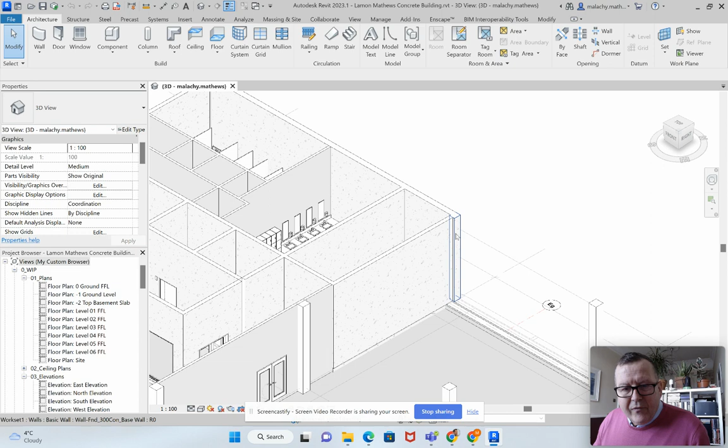So I've done a little bit of tinkering around from video number 4. I've removed those columns on either side there. I didn't need them, because this is all cast in situ concrete going on here. So it serves the purpose of the column in terms of supporting everything else that goes up above it and around it as well.

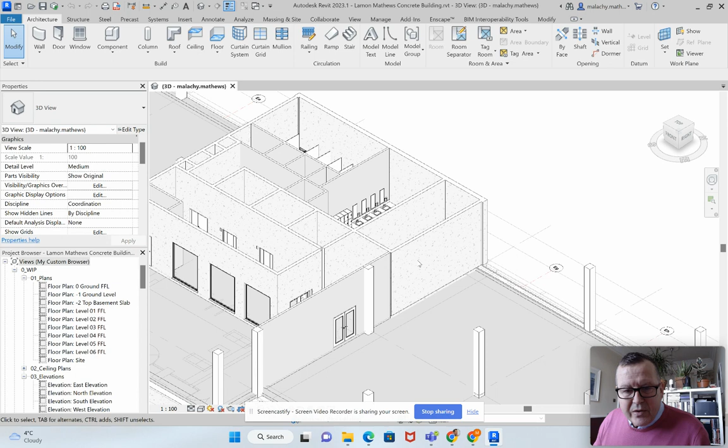I put a little bit of color, grays, into my materials as well. So you can see that's a block wall with a plaster finish to it, and that's the poured concrete wall there. Just to give a little bit of distinction, these walls in here are steel stud partitions as well.

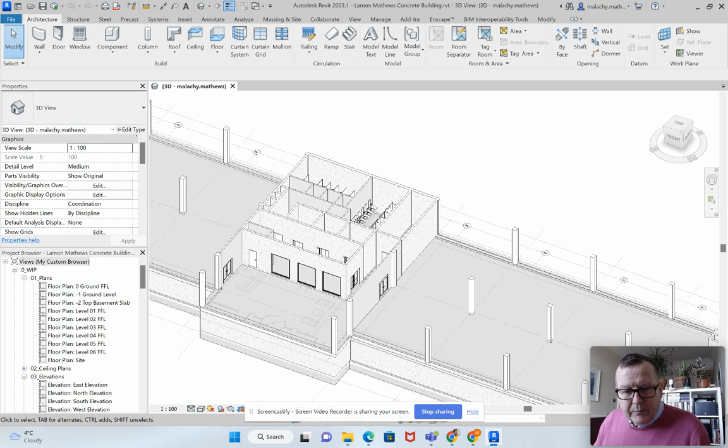Okay, what else have I done here? Yeah, I've added a couple of columns in here. If you remember in part 4, I said what I'm going to do is bring curtain walling all the way around here and bring that up 3 floors or so. And I'll come back to that at a later stage.

Now I'm pretty happy with everything that I've done so far. So what I've done is I've cut out the voids here for the lift shafts, for the service zones there, and for the stairs on the 3 cores here as well.

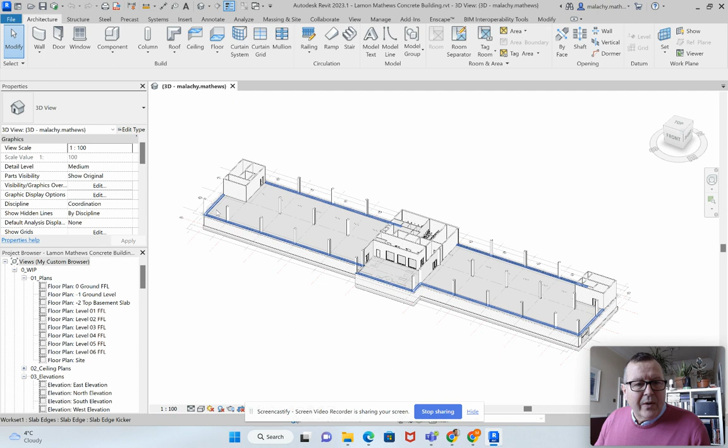All right, I've also—let me just go into the ground floor plan here, and I'll go into the section. And I've actually gone and thickened up this once again.

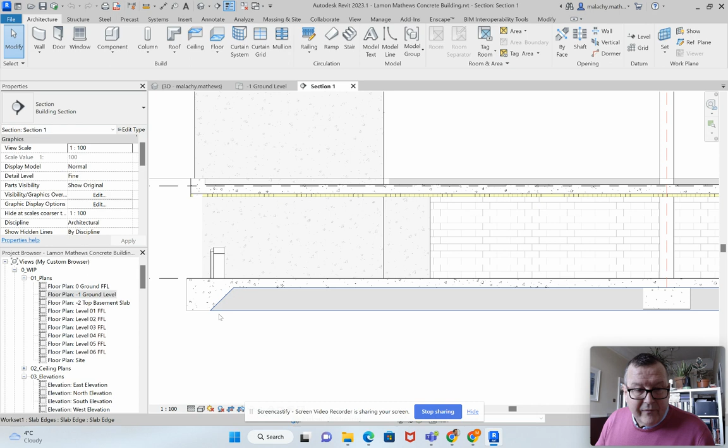So I went into the profile family and did a save as, and I just increased it. There are nice little parameters within the profile family which allow us to drop this down lower and push it out a little bit further there.

And then I changed the pads here as well. I'm now going to use a 1500 by 100 pad underneath the columns, and that kind of lines up quite nicely in terms of an even spread.

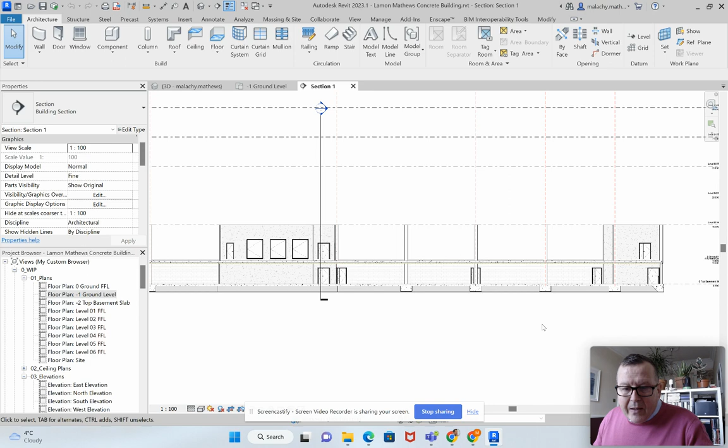And what I'm thinking about is the digger that's coming in to dig out the foundations and the pads and things like that. So that's all working out quite well there, I think.

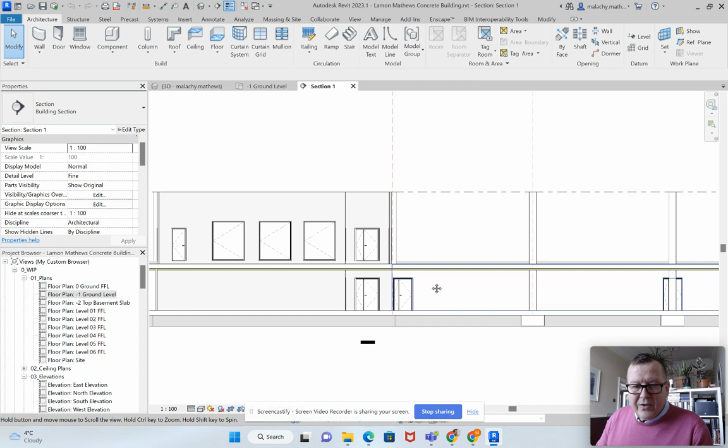You can see I've got my insulation underneath the basement slab, and I've brought down my columns to meet the slab here. Because if you remember that little grey zone there, that's actually the 200 mil that we have for the raised floor access. And that little grey zone as well there is the upstand.

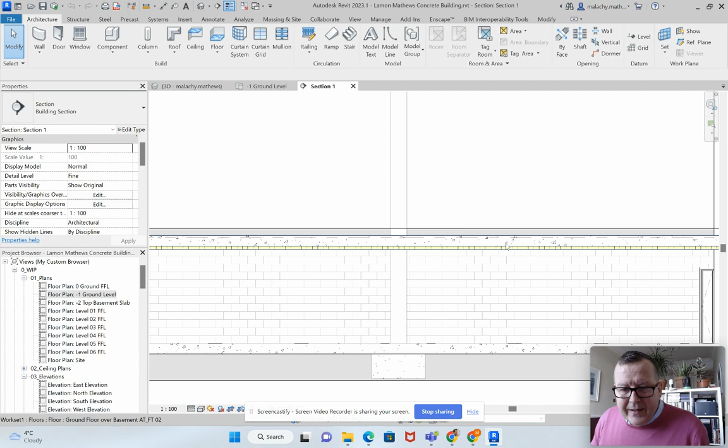Is the upstand that I created to close in the raised floor access as well. So I'm pretty good to go there now in terms of bringing this up to the next level. So that's what I'm going to do with you here now.

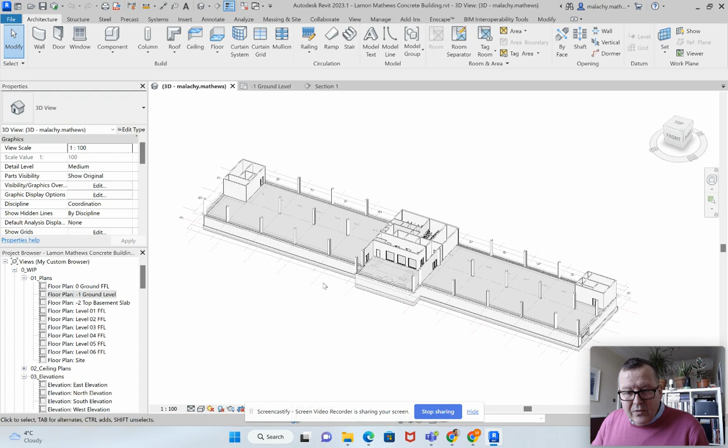And so you'll remember, in the section here, if I go across to the levels, our basement from here to the ground finish floor level is one particular dimension. Now the ground finish floor level to the level 1 finish floor level is one dimension, and you can see that this is slightly smaller here.

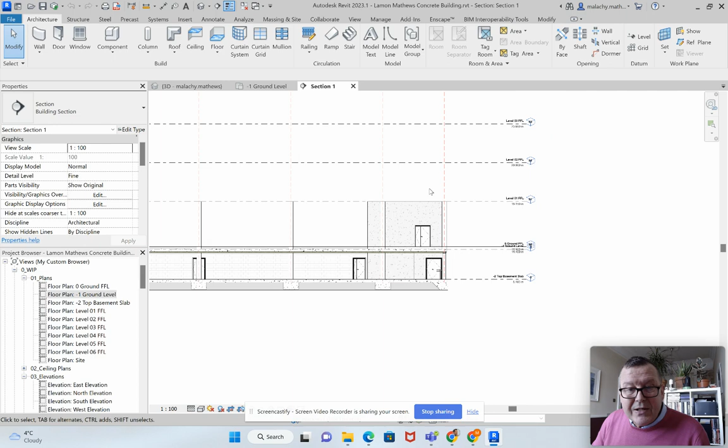So when I bring my columns up, they might be protruding too high, so we need to arrange that. But once I get it into here, I'm pretty good to go nearly the whole way up.

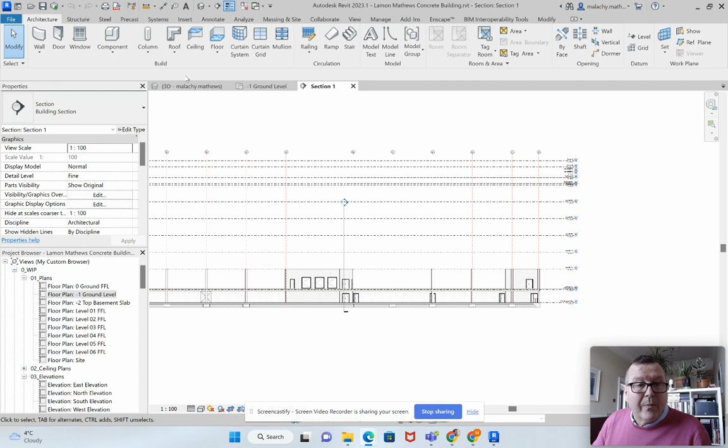Okay, so that's where we're at. We're back into the 3D. Now, this is the way I'm going to do this.

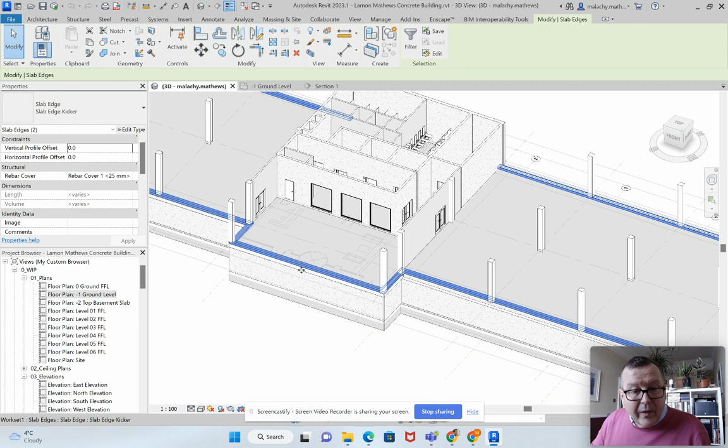I'm going to select both my upstand—so I need to there—and I'm going to select onto that my floor. If I can grab that, I want the wall. Let's get in here a bit tighter. See if I can, yeah. Okay, so there's my floor and my upstand, and I'm going to put that onto the copy clipboard over here.

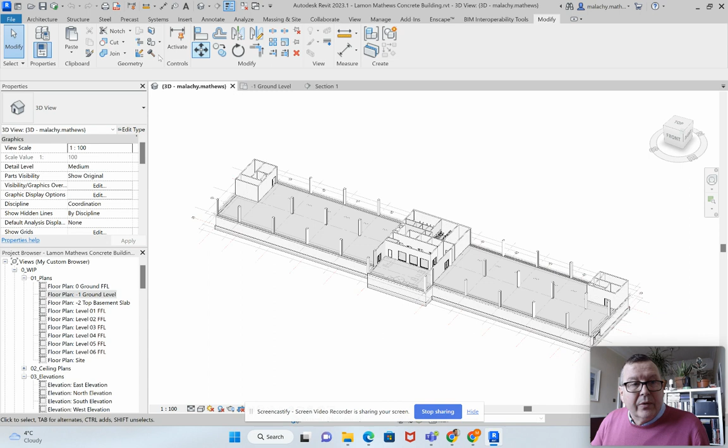So I'm in the modify panel and put that into the copy clipboard. Now I'm going to go from the copy clipboard back into here into the paste, and I'm going to say paste to selected level, and I'm going to paste this up to level 01 and go OK.

Right, now the nice thing about that is that it's bringing the voids up with it as well. If I go into the section here, you'll see that we've got the insulation. I don't need the insulation in this case here, so I'm going to select that.

And what I would do is I would do an edit type, and I would duplicate here, and I'd create a new floor. I've already done this—here it is, first floor over ground.

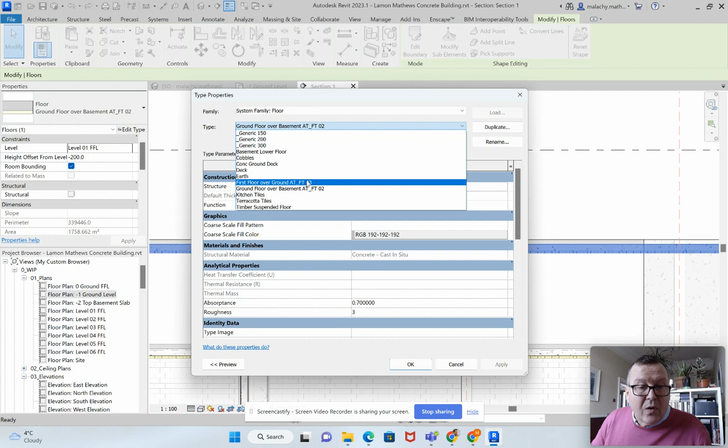Okay, so it's AT_FT 03. And if I go into the structure of it, you can see that I've taken out the insulation. I'm just leaving the concrete cast in situ there. So that's the first thing that I've done.

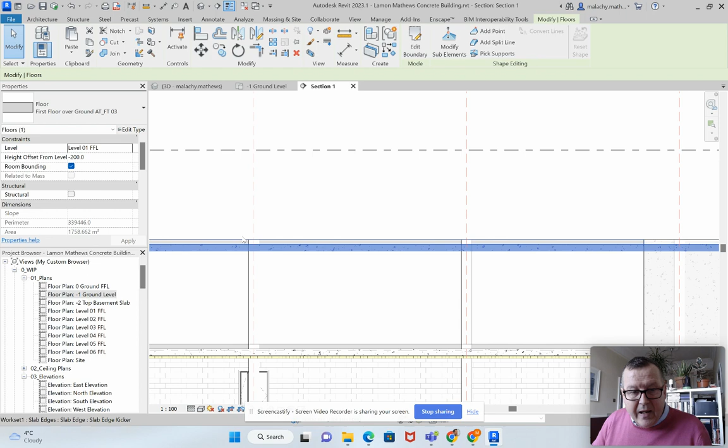And you can see as well that I'm bringing this down 200 again, minus 200 for the computer access floor as well. So if I go back to my 3D, now that floor is pretty much set.

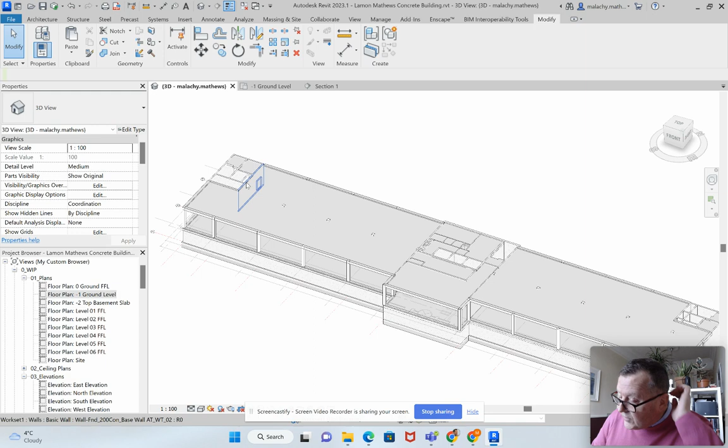Okay, you can see I've got my kickers for my columns here. I've got my kickers for the next pour of the cast in situ walls here as well, because I'm bringing those up as a core element, both in the main reception area core and the two lifts as well. Right, so I've done that.

Now my next job is to bring these walls up. Okay.

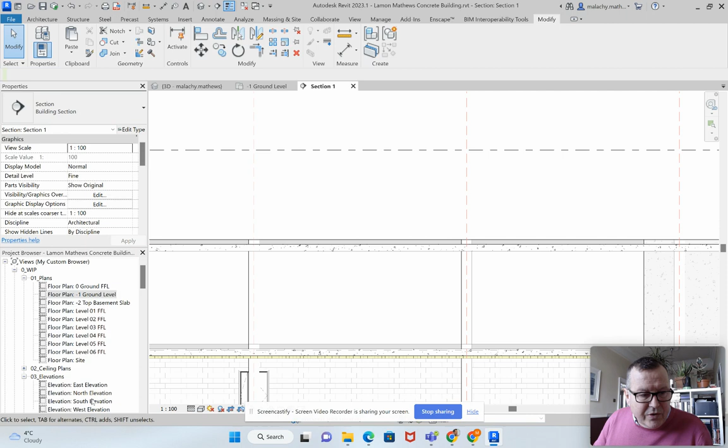I'm thinking of two ways to do this. I know these walls are too tall when they come up from level 1 to level 2, so I might just bring them up to begin with. I'm going to go into the section here, and in fact go into the south elevation, and watch what I'm going to do now.

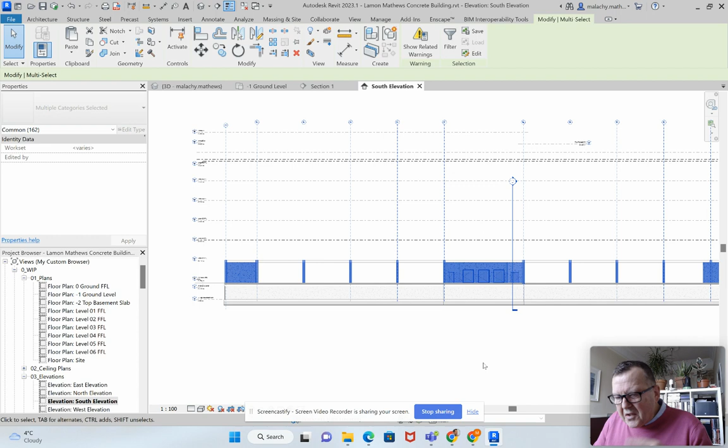I'm going to do a crossing box all the way across here, making sure I'm bringing it down low enough so that I'm grabbing all the toilets, the wash basins, and everything.

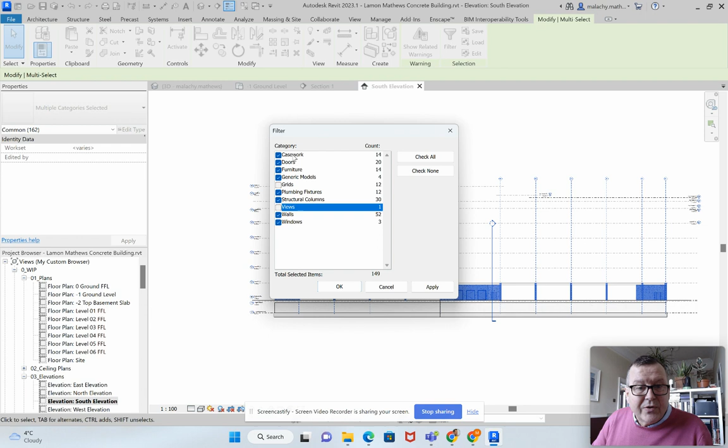Now I'll go into the filter here. Obviously what I don't want to copy are grids. I do want to copy windows and walls. I don't need the views. Structural columns, plumbing fixtures, generic models, or furniture. Everything else is good, so I'll go OK and put that onto the copy clipboard.

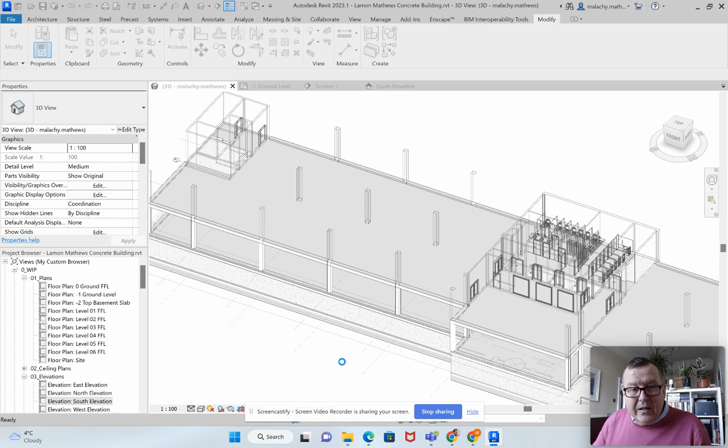We'll go back into our 3D view, click out, and now paste these to selected levels, to level 1. In a minute or two we'll unjoin certain elements and things like that. So there's my walls - my reception and my two stair core walls have come up there.

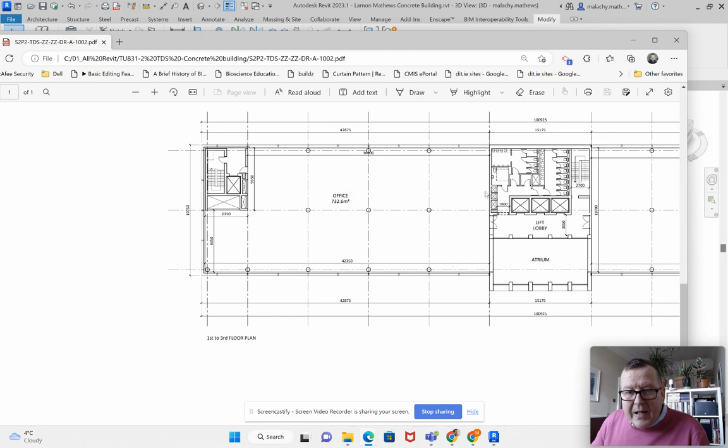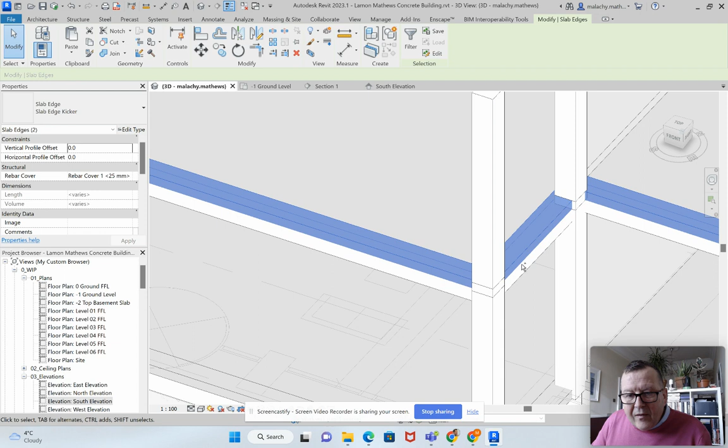But I'm going to put in the next floor. The columns have come up, just to show you there's a slight little difference here. So I'll pick the kicker and the floor, and that'll go back onto the copy clipboard, and I'm going to paste these now into level 2. Now that shows you what's going on here.

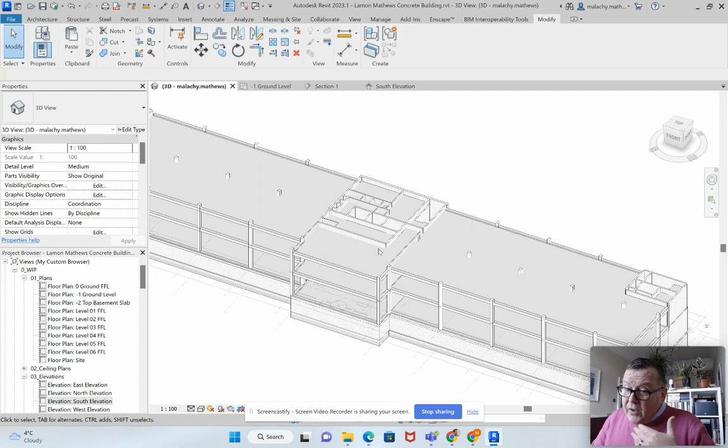So the columns are a little bit high, and the walls are a little bit high here. I just want them coming up 200 above the floor level there, so that's something I'm going to adjust.

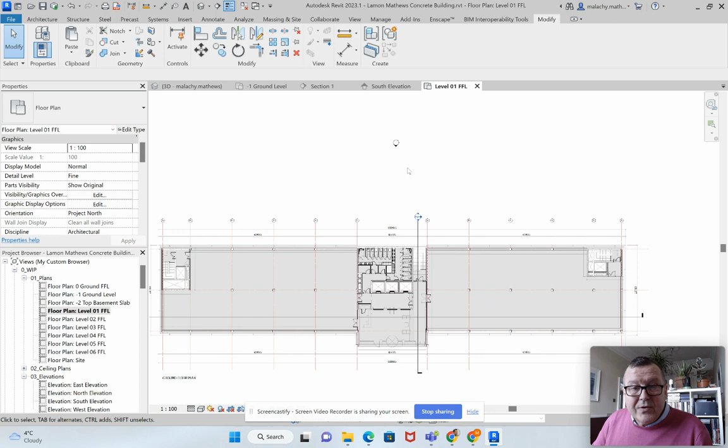When I've made the adjustments to level 1, I need to make those adjustments around here, then drop down those levels just to show you what I mean. I'll go back to the 3D here. If I take that particular wall and come over here, you can see the top offset is 650. I need to change that to 0, and watch what happens now - okay, so now it's 200 above.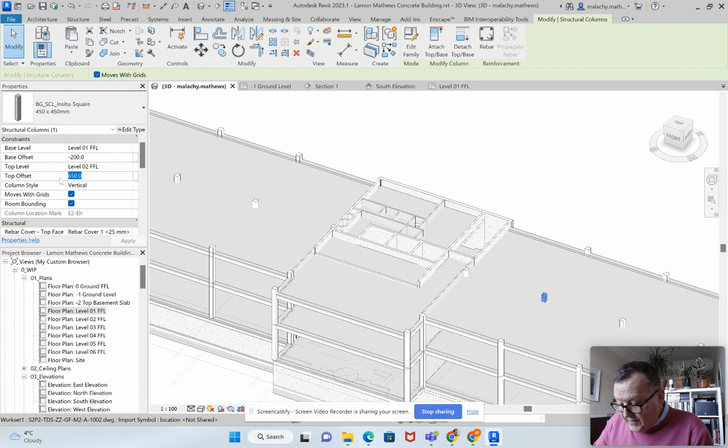Remember, we're doing this in a few stages, so that's the right thing to do here. That wall is gone, I know that - and that wall is gone too, I know that, so I need to go around and pick the rest of the walls. Also with the columns here, again you can see they have a top offset of 650, so we're going to make that 0, and now those are correct.

So that's a little bit of work I need to do, to take down all of these so they're correct in terms of the next pour. I need to go into my level 1 and do the adjustments here. Once I've got that done, I'm pretty good to be able to do that same system again - copy and paste up to level 2, up to level 3.

Now at level 4 and on, it changes again, so we'll address that at a later stage - that'll be part 6 or part 7, something like that. But that's not bad. It's still not finished by any means - I still have to do my stairs in here, and that.

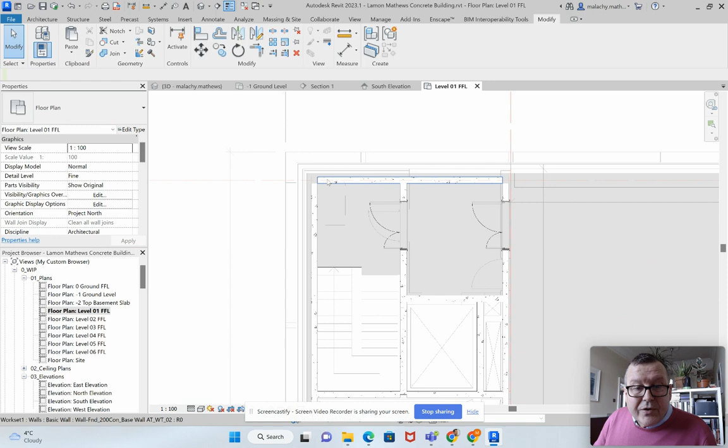But when I do the stairs, I'll probably have to adjust that landing there. I need to do a little adjustment there by the looks of things, and tie those columns in. So you need to go through this carefully. I think that removes - again that's part of the adjustments I have to do for that core area. But overall, that's not working out too bad at all.

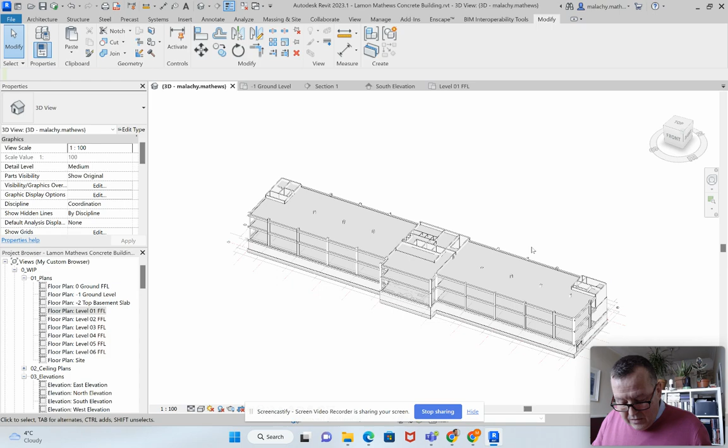I'll just do a little zoom around so you can see what's happening here - we're getting that cast in situ concrete pour coming all the way up here. And according to the elevation drawings, I'll just show you those. This is the back elevation, so that's exactly what I'm building here, this cast in situ concrete.

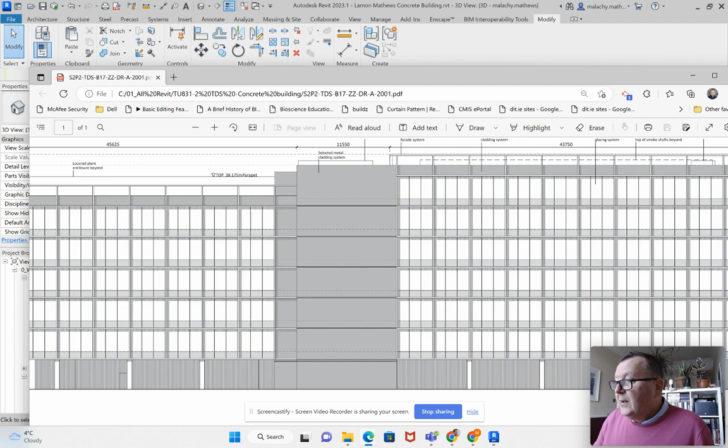And it's got a selected metal cladding system on the outside there, so it's very easy to attach the rails to that and attach the cladding to that - pretty simple to be able to do that one. So I'll shift this one across here.

Right, so what I'll do is for part 6, I'll have all of that adjusted and done, and I'll be ready to go then with part 6, which will be copying and pasting that set of building elements onto the next floor.